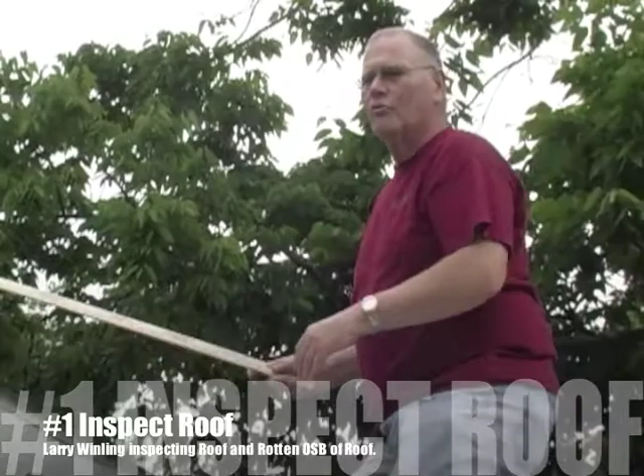A number of the shingles have deteriorated, and that needs to be replaced on the entire roof. We've got branches overhanging, rubbing against the asphalt that have started to wear. So what we're going to do is remove the shingles, remove the felt underneath and the drip edge around, and we'll cut back the sheathing, the OSB sheathing, for 2 feet.

Pull that off, cut a new piece, replace that. We'll replace the drip edge, the soffit if it needs to, on both sides, not the front and back, but both sides. And then we'll put new felt on, they call it tar paper, but new felt on, and new shingles. And then later, the entire remainder of the roof will also be done.

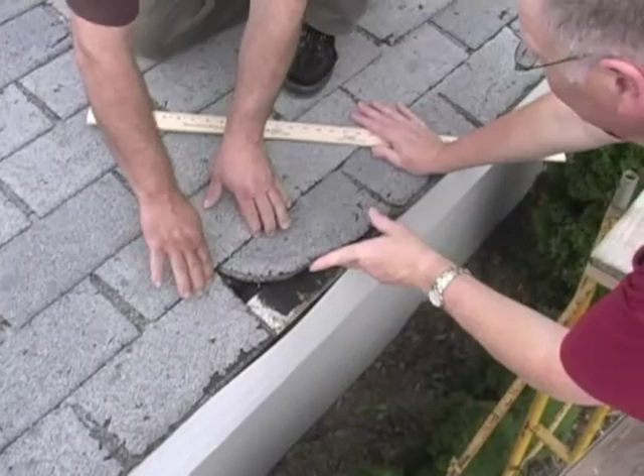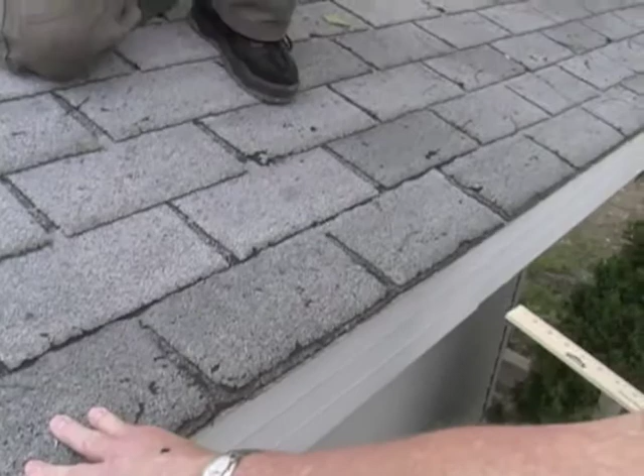And the length of every shingle is the same way on both sides of the roof, and that's every shingle, so it's like an 1/8 or 1/16 of an inch. You can see down there, the sub-fascia boards are also bad. On the other side, they're even worse. See right here, you can tell they were in a hurry. Look how wide this row is. Look how wide that one is. All right, yeah, you can see that one.

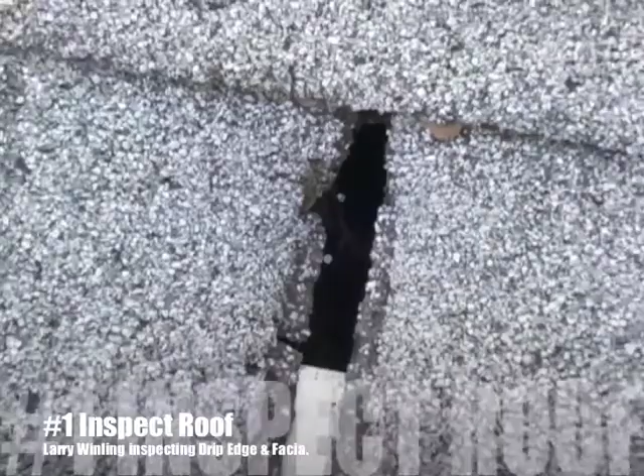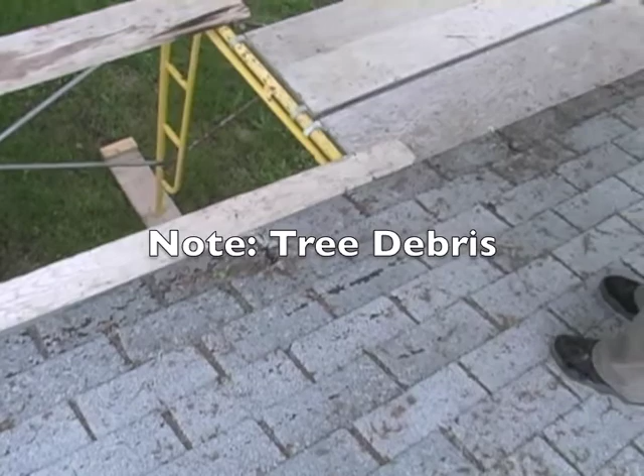All the way through it because I pulled the fascia down. They made more mistakes on this side than they did the other side.

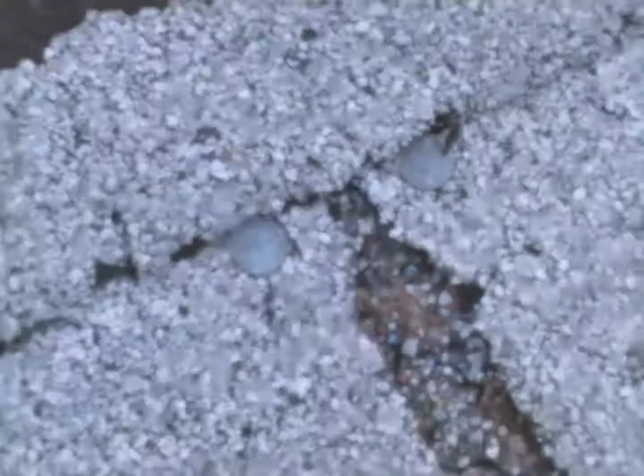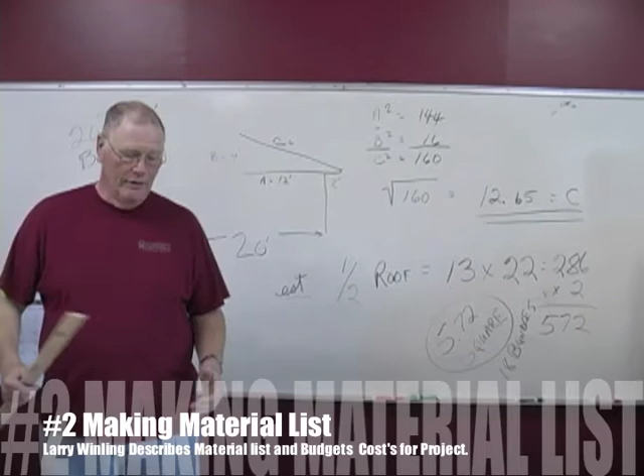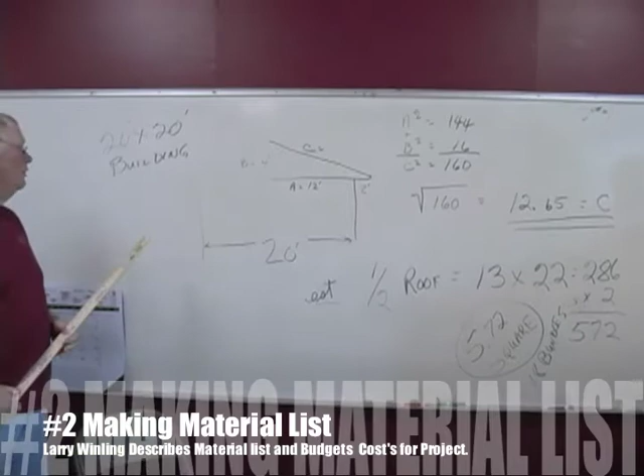Part of the job is figuring out what the materials are going to be for a project. For our roof project, the first thing we have to calculate is the dimensions of the roof and the number of shingles we're going to need. So our building is 20 by 20. There's a 2-foot overhang on each side, and there's a 1-foot overhang on the front. And it's got a 4/12 pitch on it.

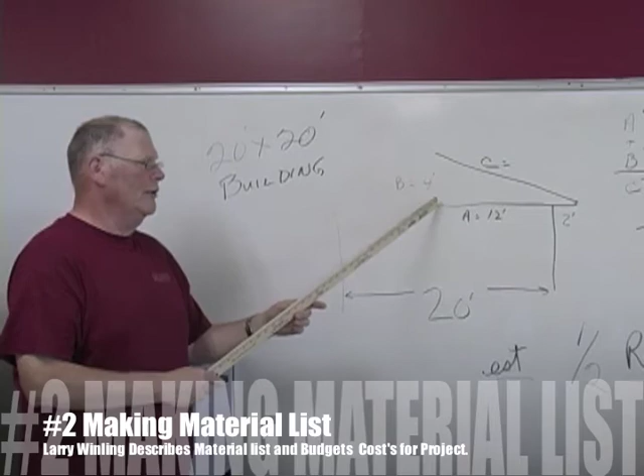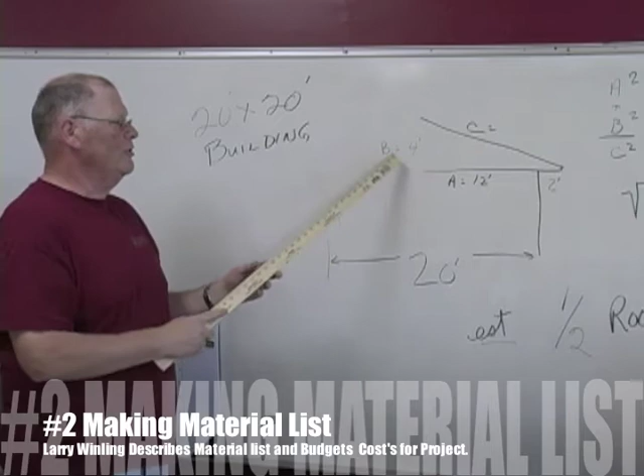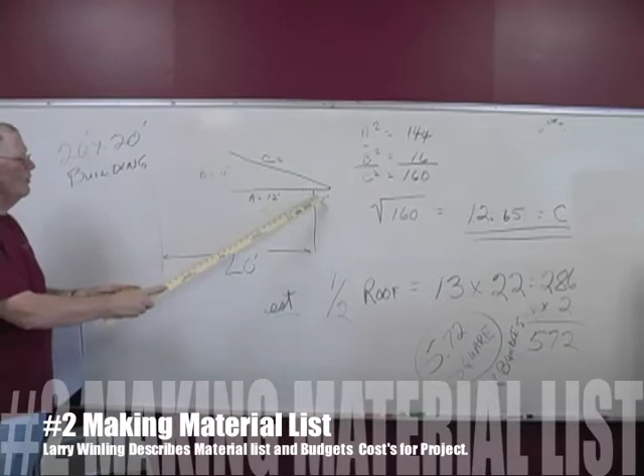So from the peak to the bottom of the roof here is 4 feet, and then from the center to the outside of the eave is 12 feet. So if you remember your geometry class, a squared, which is 144, plus b squared, which is 16, comes out to 160, which is c squared. You take the square root of that, it comes out to 12.65. So this dimension would be 12.65 feet. We rounded that up to 13.

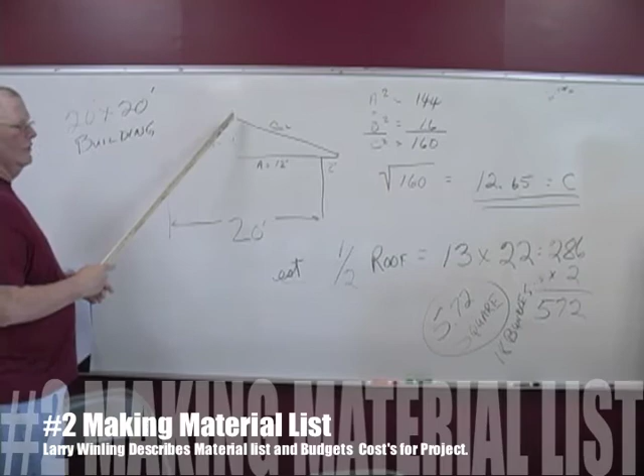So for this half of the roof, it's 13 feet this way, and then it's the 20 plus 1 in the front and 1 in the back, or 22 feet. So you got a total of 286 square feet for this half of the roof. Times 2 is 572 square feet, give or take.

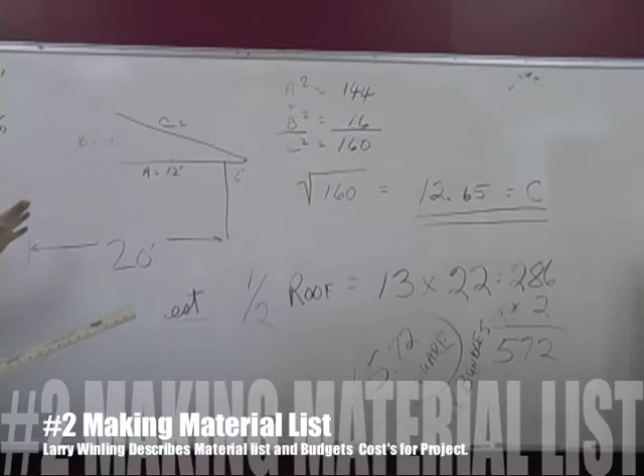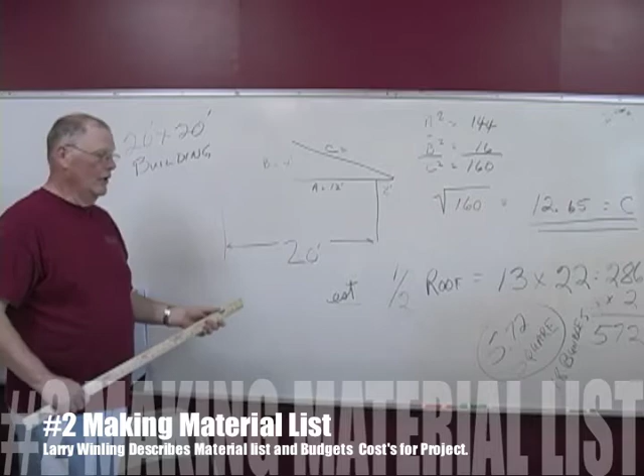Now, shingles, normally if you're using 3-tab or the dimensional shingles that we're going to be using, are normally 3 bundles of shingles to a square, which is a 10 by 10 area. Well, it's a 10-foot square. We've got 572 square feet, so we've got 5.72 squares of shingles.

If you round that, again, round it up to 600, or to 6 squares. You've got 3 bundles to a square, so we're going to need 18 bundles of shingles. And that's what we're putting into our materials list, 18 bundles of shingles. On the ridge right up here, there's a special shingle that we're ordering that's going to seal that so that there's no leakage or anything. You'll see that they stack, overlap. So we've got 1 bundle of those.

We've got the rolls of felt. We've got 2 rolls of felt. There's going to be about a 6-inch overlap. You always do that so that the water runs downhill. It's not going to get into that OSB sheathing. The drip edge is 10 feet long. We're going to do the whole outline, so we're going to need 10 lengths of 10 foot.

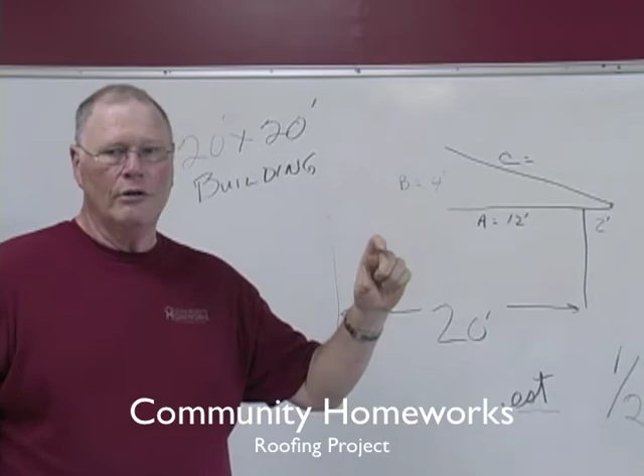The drip edge that was on that building is only 1 inch high. We're getting the newer material that's 1.5 inches, so there'll be enough overlay that we're not going to have to worry about problems that we had in the past.

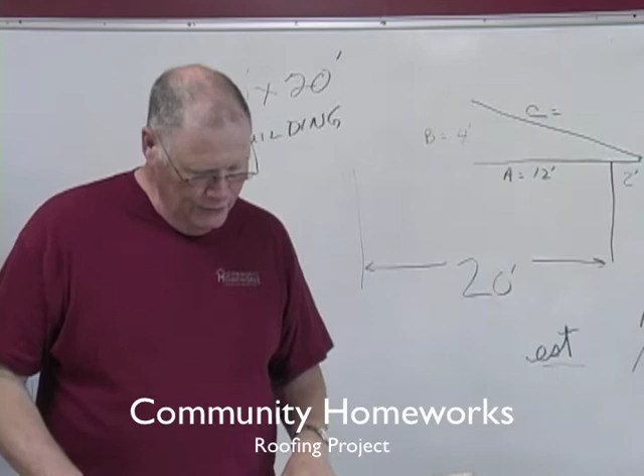We're going to get a carton of rolled roof nails so that we can use a nail gun later when the folks do the remainder of the roof. When we do our initial project, we're going to use roofing nails. We don't want anybody getting hurt with any of the automatic stuff. We're also going to use a box of the stainless steel nails for the soffit. We'll get into that later.

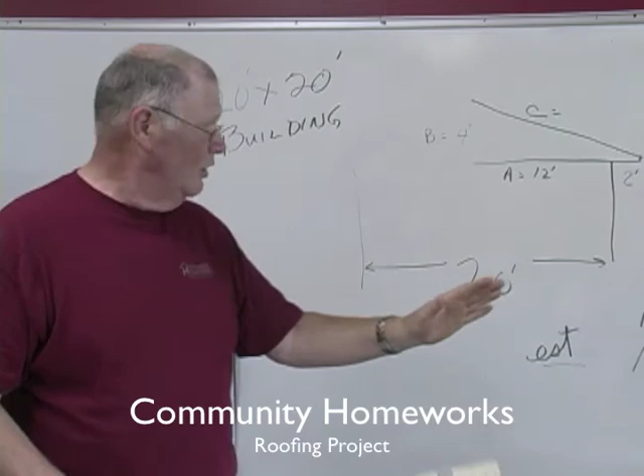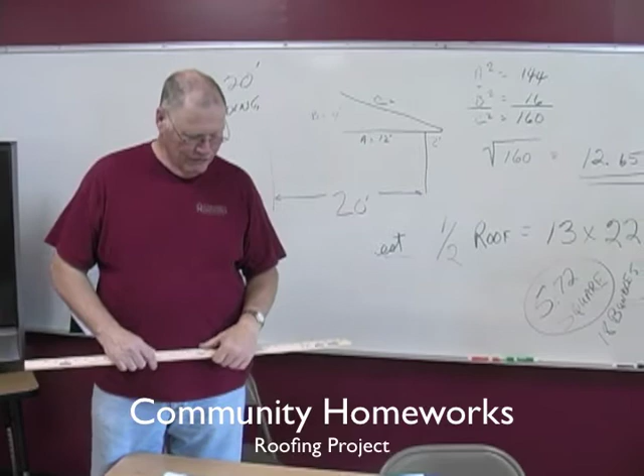We're going to get 4 12-foot lengths of fascia, down either side here, because those had deteriorated. We're taking those off. The partner wanted to make sure we've got nice new stuff on. The wood underneath, as you saw, was deteriorated. We're going to replace that sub fascia, and we're going to, again, cut back 2 feet here and put new OSB in there.

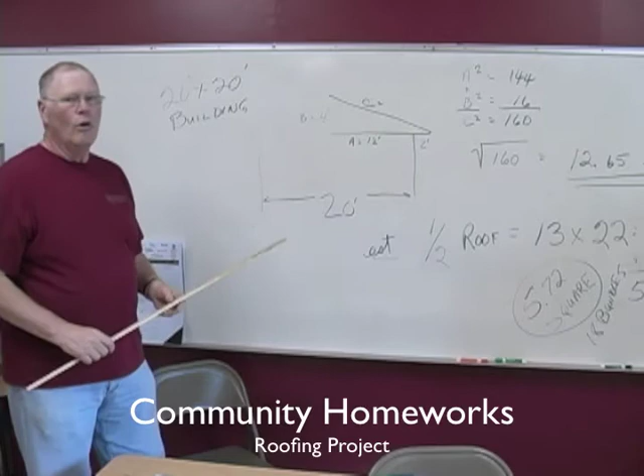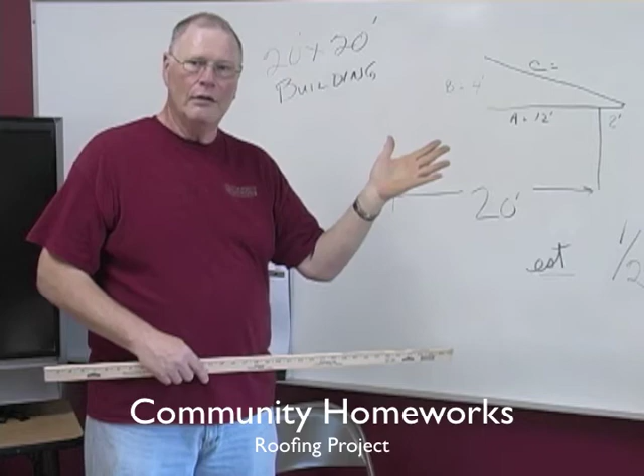In your packet, there's an explanation of what OSB is, and it's very prevalent for strength, etc. This roof was installed 20 years ago. They were using 1/2-inch material at that time. There is a stamp on the bottom of that so we can tell exactly what's up there, because it's difficult otherwise. So we're getting OSB to match that. We'll cut that to 2 feet, and we'll put that down so that they won't have any problems with those big holes in there anymore.

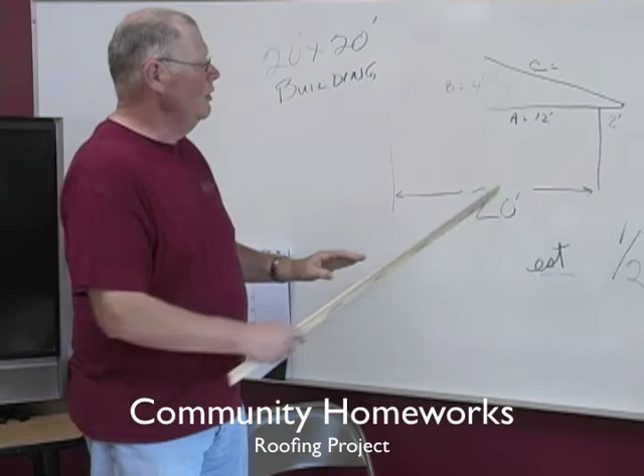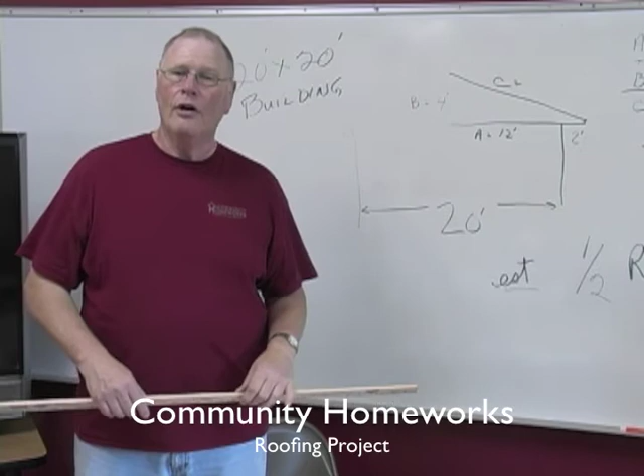And then over here, we have 2 electric masts that have got boots around the bottom. Those also are older, they're deteriorating. Our partner wanted to get brand new ones and put those on, so we're going to do that. So the entire project is estimated to cost just shy of $1,200 for materials. That doesn't include the labor.

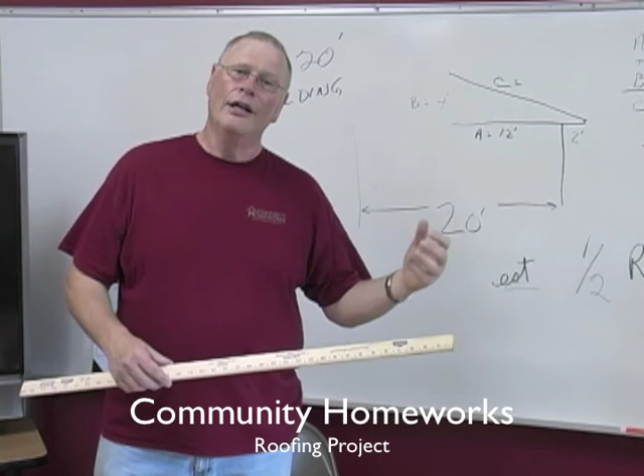And if you're looking at any sort of project of any size, once you determine this, you can see: are you going to be able to do it, or are you going to need a contractor to come in and give an estimate? And this way you have an idea what the estimate should cost as far as materials, or is it something you can do yourself?